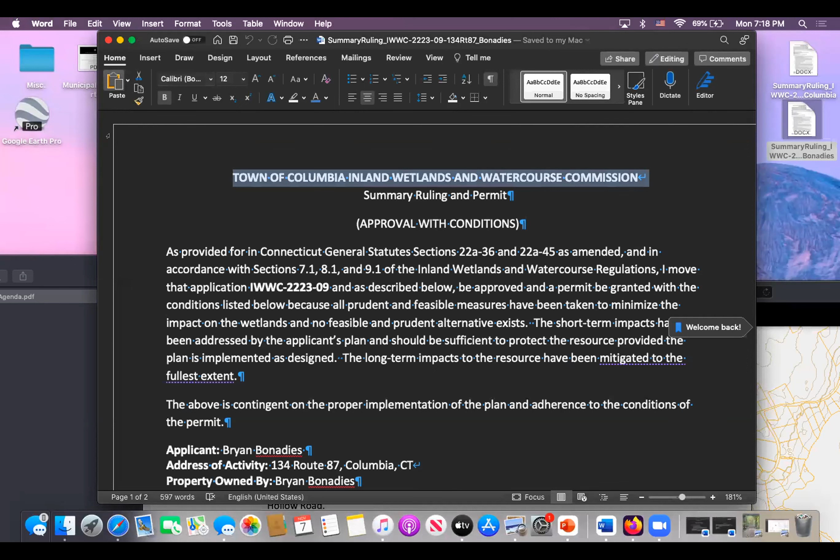Okay, do we have a motion for a summary ruling on that? Yes we do - I'll share again. This is for application 2223-09, the application of Bryan Bonadies at 134 Route 87 for the reconstruction of docks on Columbia Lake.

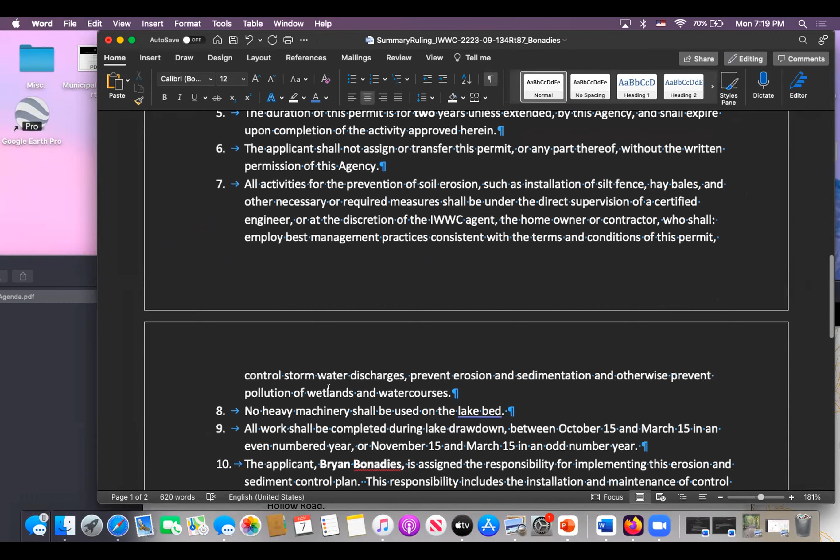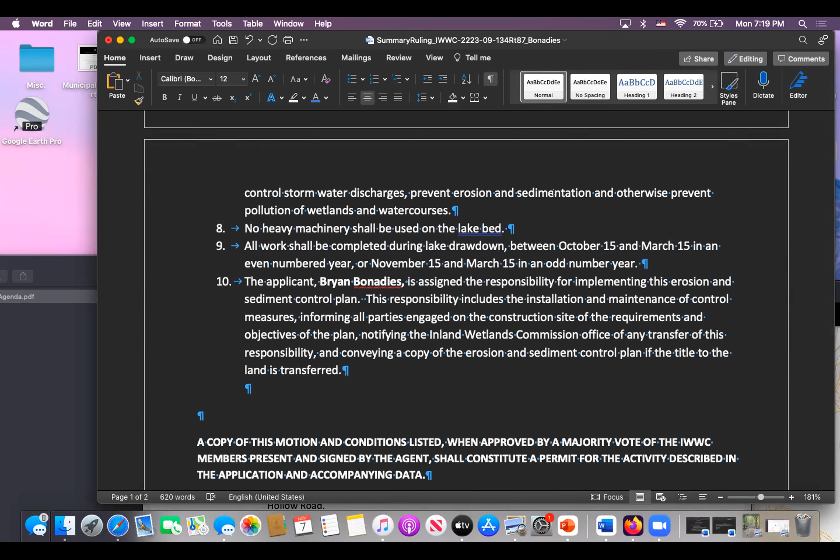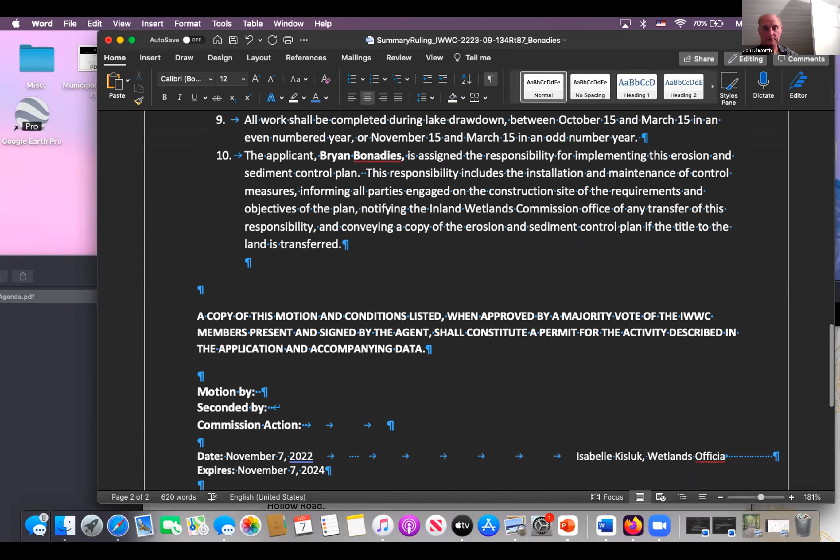Again, the Inland Wetland Commission agent is to be notified 48 hours before commencement of any part of the activity approved above. The duration of the permit is for 2 years unless extended by this agency and shall expire upon completion. No heavy machinery shall be used on the lake bed. All work shall be completed during lake drawdown between October 15 and March 15 in an even numbered year, or November 15 and March 15 in an odd numbered year. Bryan Bonadies, as the applicant, is assigned responsibility for implementing the sediment and erosion control plan, including installation and maintenance of control measures, informing all parties on site of the plan's requirements, notifying the Wetlands Commission office of any transfer of responsibility, and conveying a copy of the plan if title to the land is transferred.

Does someone want to make a motion to accept the summary ruling Isabelle just read? I'll make a motion. Thank you, John. I'll second it. Very good, thank you Ron. All in favor, raise your hand. Aye, so moved. Thank you.

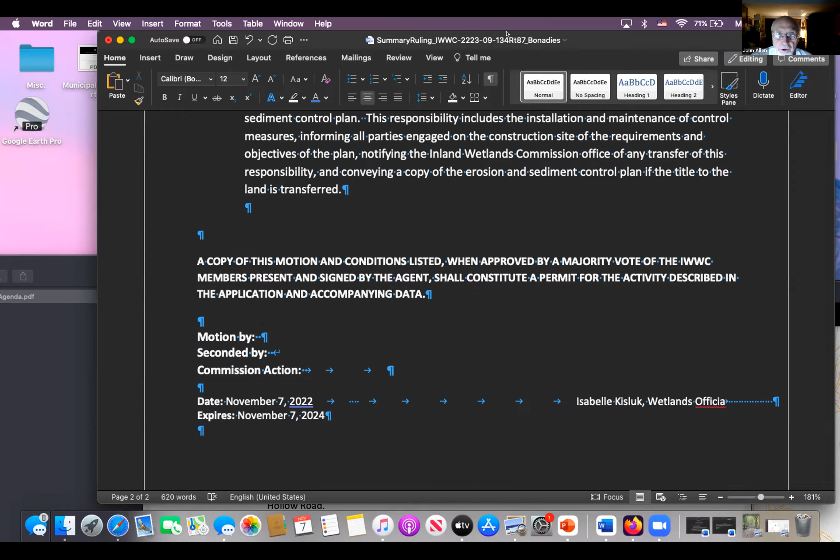Hey John, just a quick side note on this, and Brian just to alert you - LMAC as an advisory commission sends letters to the Board of Selectmen on November 15th, next week. They have a letter advising approval of this per LMAC with a slight modification in the length of the dock. Brian, I'll send you a copy of that letter so you have it, and it should be approved by next Tuesday. Very good, thank you. Sounds good, thanks.

Okay, I think that was the last thing under old business, so let's go on to new business. Item 7.1, IWWC 2223-15, the application of James Doran to repair and patch spalling and compromised retaining wall or seawall at 7 Lower Woodland Terrace.

So it just came in last week. I don't know how many of you are familiar with the Lower Woodland Terrace properties, but this one in particular used to be number 5 and now it's number 7. So it's a little confusing, but it's the one with the very steep driveway in the front and a walkout basement behind.

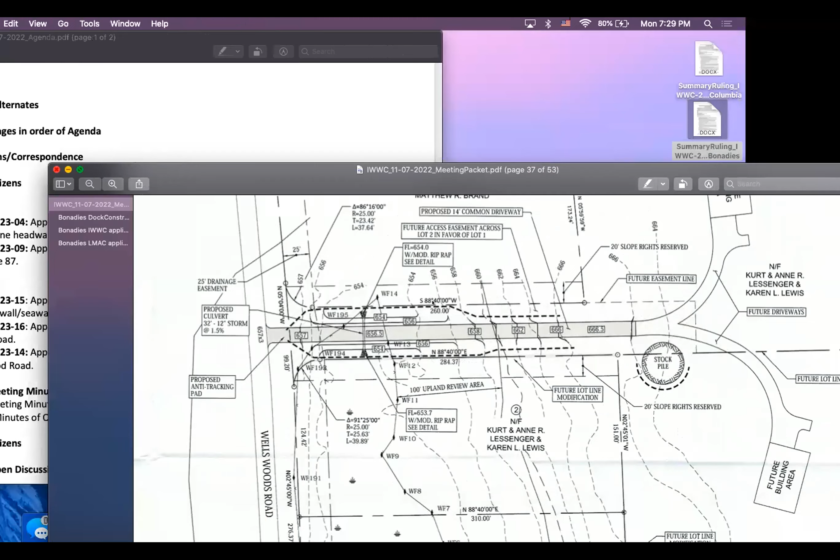I think we need a site walk on this application also. Isabelle, do you want to show us the map or share a screen? I can show it, yes. Everyone can see this? I don't know why it's showing 2 pages at once. There we go, perfect.

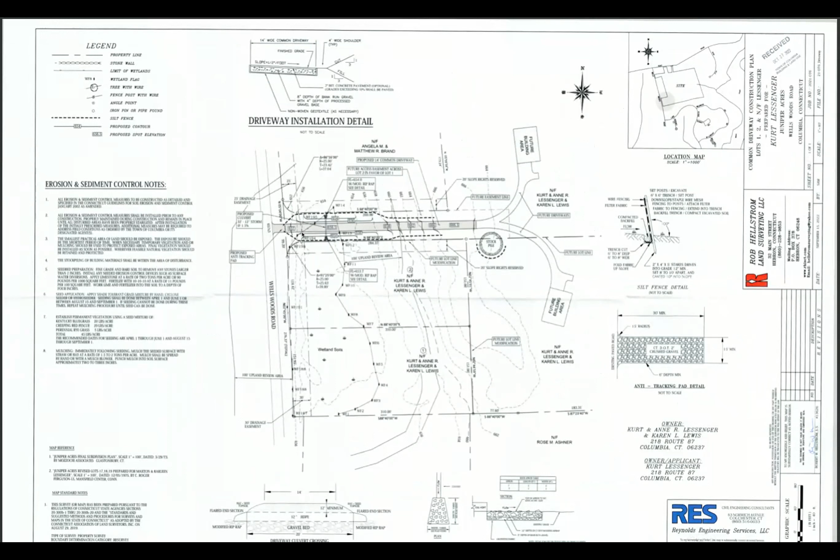So this is the area of wetlands here that will be crossed, and like Jim said, it'll be serving 2 properties. I believe it's about 100 feet, a little bit less, at the narrowest part of the wetlands area across those 3 lots. That's why we picked that, the least impact.

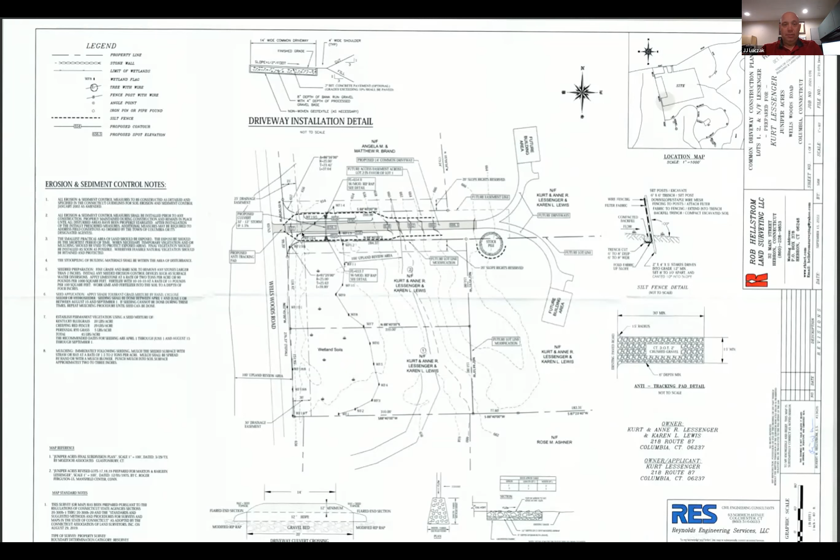Again, these lots are lots of record. Instead of coming in for two driveways to serve these lots, he wants to put just one driveway in. If we get that approved, which I believe we will, he'll go forward with a lot line revision or re-subdivision, whatever we need to move the lines around.

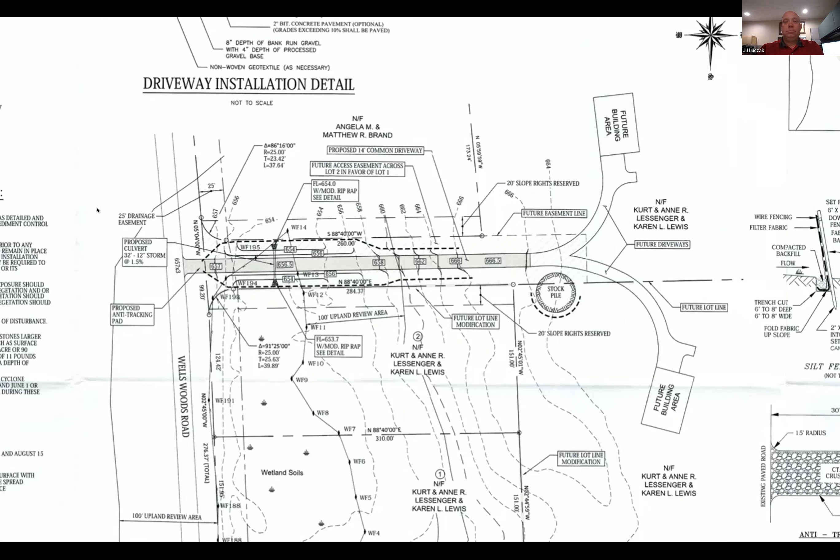Anybody have any questions on that? Okay, so we'll set this up for a site walk at the end of the meeting. Okay, great, very good. I'll be your tour guide. All right, item 7.4.

2223-17, I'm not sure what that is, can you give us a summary of that application? It's Bill Leff to rebuild 98 feet of stone wall at 50 Erdoney Road. Do I have a motion to accept that application?

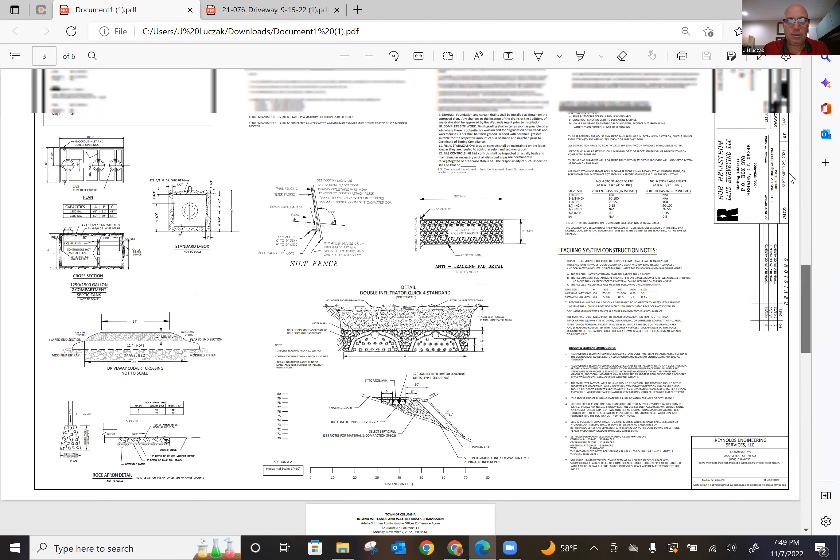It's just unpermitted filling next to wetlands, as you said, and you wanted to discuss it tonight. Let me find this over here. Okay, so this is the overall picture of the property.

This is the center line of Mint Brook. This is the flagged wetlands, and the 100-foot review area does cut across this corner, which I believe is the area of your concern. Is that right, Isabel? Yes. So that's the first culvert pipe within the 100-foot review area, and then the additional culvert is up here a little further, right here.

And so that, I would say, is really an intermittent water course at this stage. That may be my interpretation, and I had John back out to the site to confer. My interpretation is that this was an old stream bed that was essentially diverted through other development, mainly these three or four properties above it that changed the grade. Now I believe it's a footing drain or something that outlets into that area.

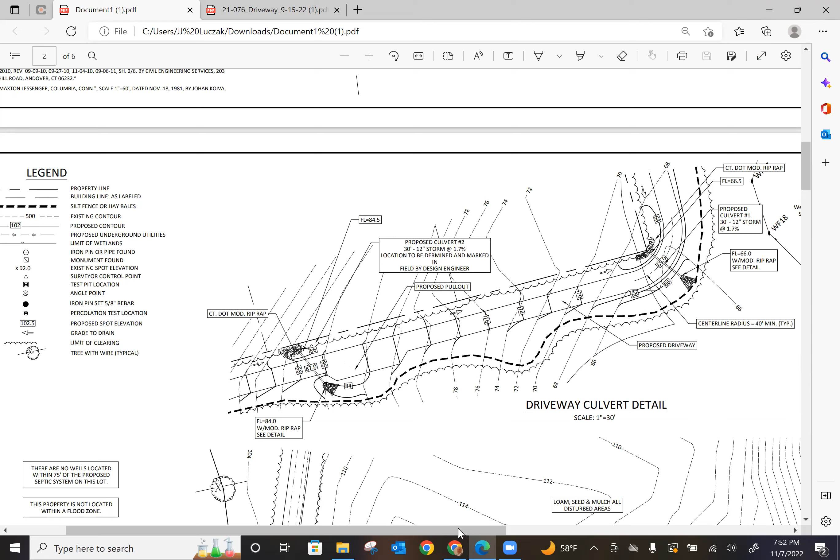This is probably the deepest of the fill. The pipe is at 66, which is existing grade, so really we're just digging out a little organic material, putting in the pipe, and then filling it over with a couple feet of road base. Overall, like here, original grade 72, finished grade 72 - we're not talking about a huge cut and fill. This is following the existing grade pretty closely, as you can see from the contours there. Here you have a little bit more fill, but overall we're really just following the existing grade.

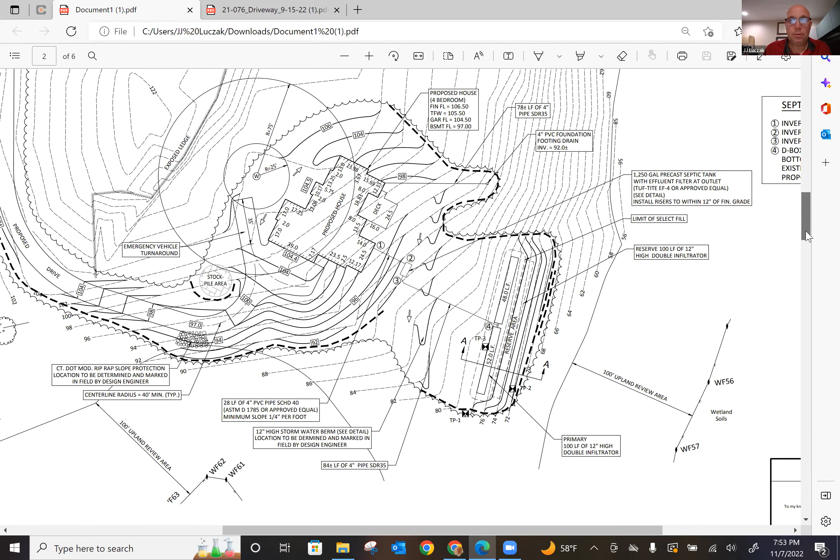I have a question. You're representing Peter on this issue, correct? And what firm are you with? I'm with Reynolds Engineering Services. Okay, thank you.

Any other questions? If not, I think we can let Isabel work with him and work it out.

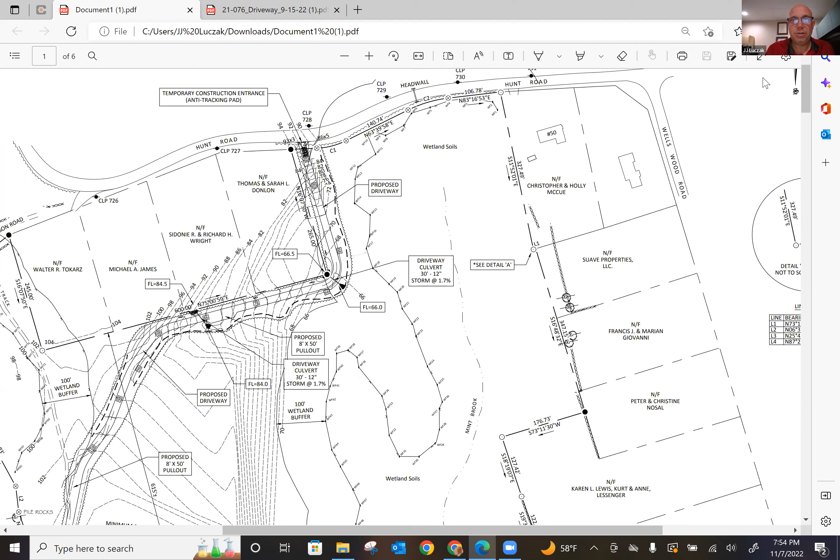So I'm going to stop my share. I hope I can do that. Okay, there we go, stop sharing.

So Jim, I'm happy to work it out with you and complete that administrative approval just as soon as I see some basic dewatering plans for those two areas.

Absolutely, we'll put together something for you. It may be as simple as not planning on dewatering unless we have water. And if we do, it'll just be a diversion, then pump it upland, not downstream, to some protected area. We'll put that in writing, put it on the plan, and get it to you as soon as possible.

That sounds good. Thank you very much for joining us and representing this. No problem, we'll get this sorted out. Yeah, we'll get through this and make sure everything's done right. Okay, thank you very much.